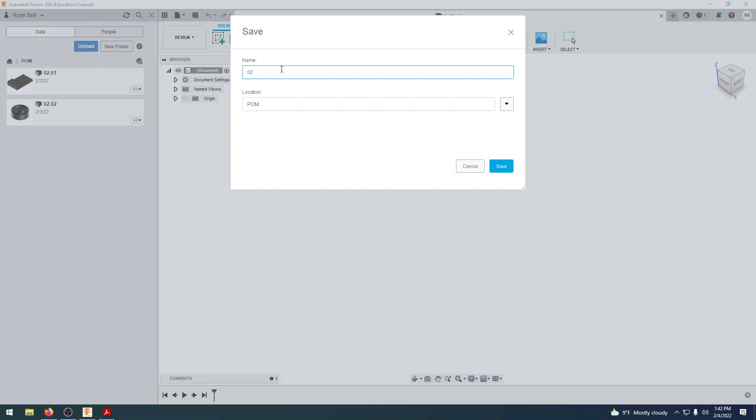So let's begin. Before we start, we always want to make sure we're saving our stuff in the proper folder, so we're going to open up our data panel. I'm in the wrong folder for my class, so I'm going to go to my home project list. I've been saving these in a folder called POM, so there's my first two right there. I want to save this as 2-3, and we'll click save before we even start.

Now that we're set up, let's take a look at our part. We have a socket head with two circles that are 3/4 of an inch apart, and then we're going to draw two tangent lines on them.

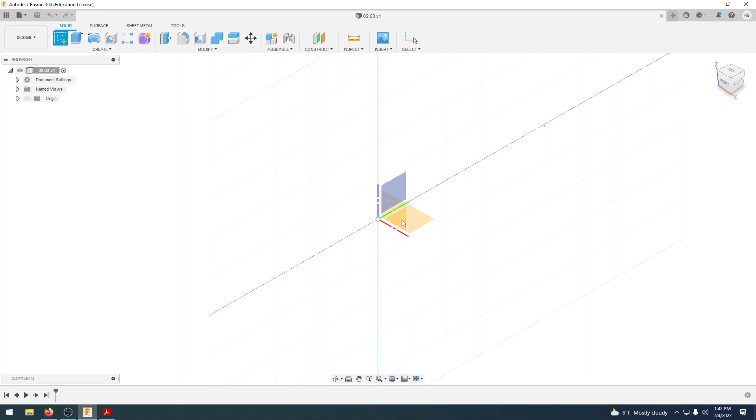I'm going to go back to Fusion and create a sketch, and this one I'm going to put on our XY plane. Remember, our X's are red, our Y is green, Z is that blue plane, and we'll be doing more in the Z plane later on. We have a radius of 0.6 for our bottom circle, and a radius of 0.75 for our top circle.

Remember that our radius is half of our diameter, so when we draw our circles it gives us a diameter, so 0.6 times 2 is 1.2, which will be our bottom one. And this point is about 0.75 above that point.

So I'm going to create a construction line. I'll create a line, change it to a construction line, and start from that center point and go up 0.75.

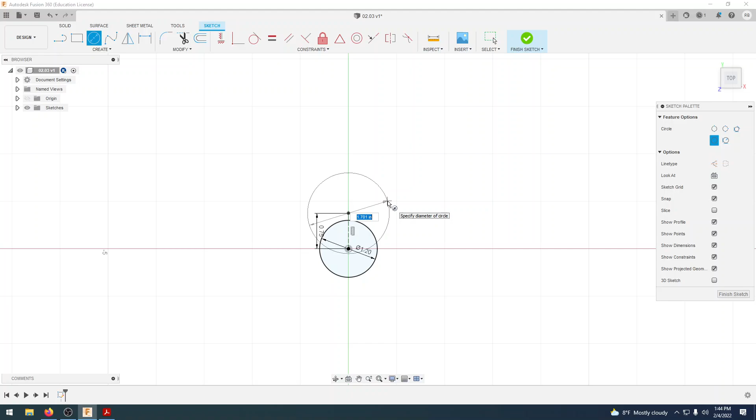Now I'm going to change it back to my regular object line, and create another circle on top of this line. This is going to be a radius of 0.75, or a diameter of 1.5, because our diameter is twice that of our radius. So now I have two overlapping circles, and I want to draw my two sides here.

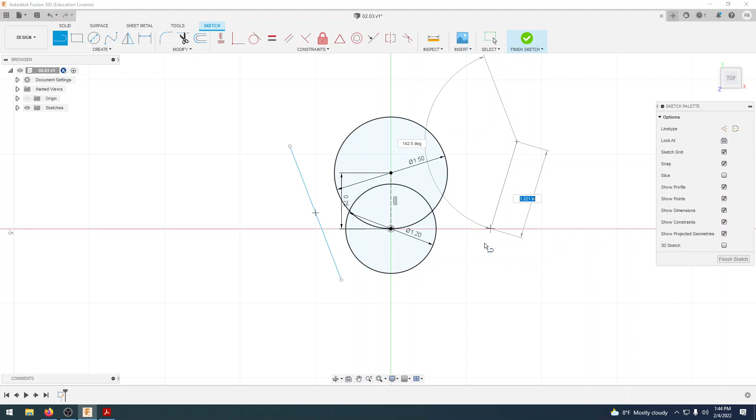So I'm going to draw a line, just off to the side, and hit the check mark to complete it, then the same thing right there. It doesn't really matter the angle or the distance, because the next thing we're going to do is make this line tangent to both that circle and that circle, and the same thing on this side.

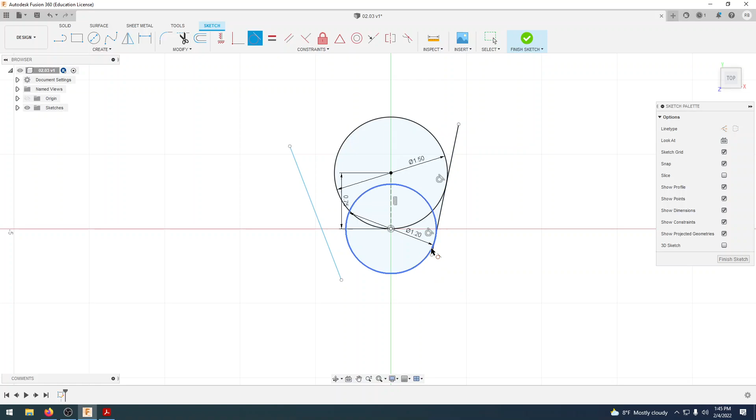I'm going to select my tangent constraint, because we notice these two circles are fully constrained - the lines are all black, but these two are still blue, so we need to constrain these. I'll take my tangent constraint, select the line, and select my top circle, same thing with this bottom one, so now this one is tangent with that side. Then we'll do the same thing on this side as well.

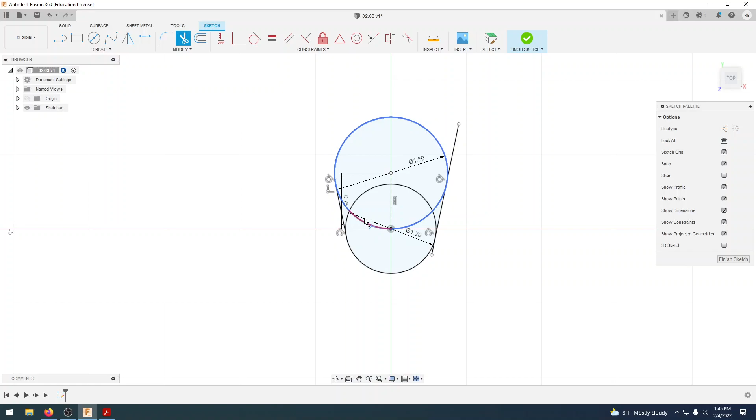The last thing we want to do is trim it. If you don't have your trim right there, you can click modify and go down to trim, or use the letter T on your keyboard as a shortcut. We're going to trim away the lines we don't need - don't need that line, don't need that line, and we'll trim away that right there. When we're finished, we click Finish Sketch, and there we have our completed sketch.

The next thing we want to do is go back to the print and take a look - it is 1 inch the entire way, and that will be really important later on. Also, from there to there is 83 degrees, or if we were to draw a vertical line right there going in, that would be 7 degrees coming in.

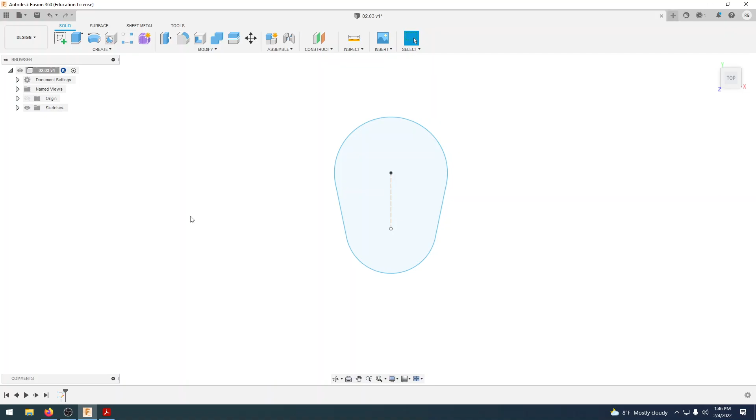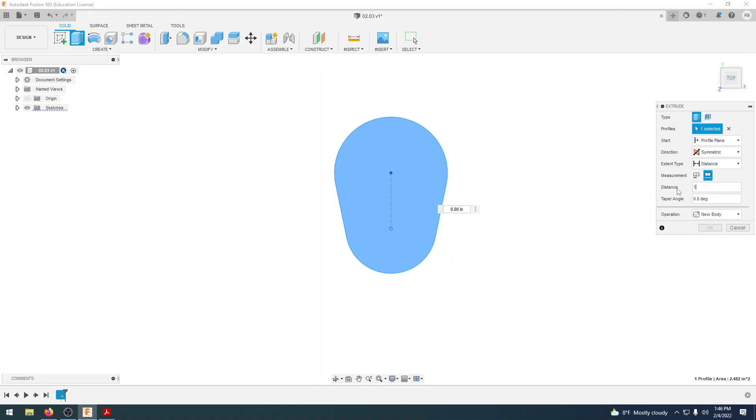We'll do that all in this extrude. So I'm going to extrude this sketch right here, and in our extrude window, instead of just having one side for our direction, I'm going to do a symmetric extrude. We want to make sure we're using a distance, and it's going to be the whole length - remember our distance was 1 inch, meaning it measures 1 inch the entire way.

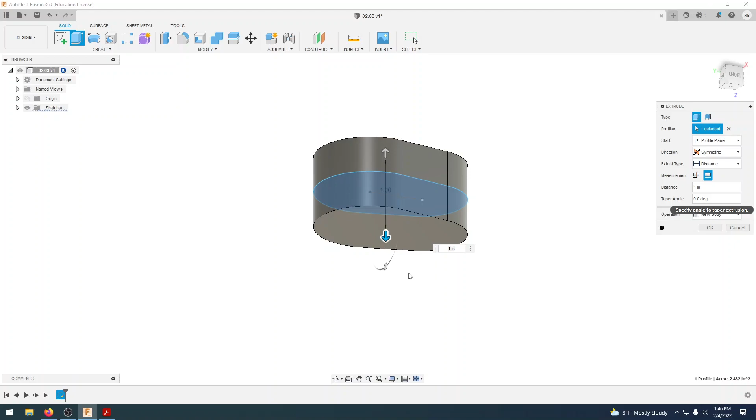If I did this first one, it would only be that inch measurement on one side, so that would actually be 2 inches, but I want a whole length of 1 inch. Just a reminder, to orbit around you hold down shift and your scroll wheel to be able to do that.

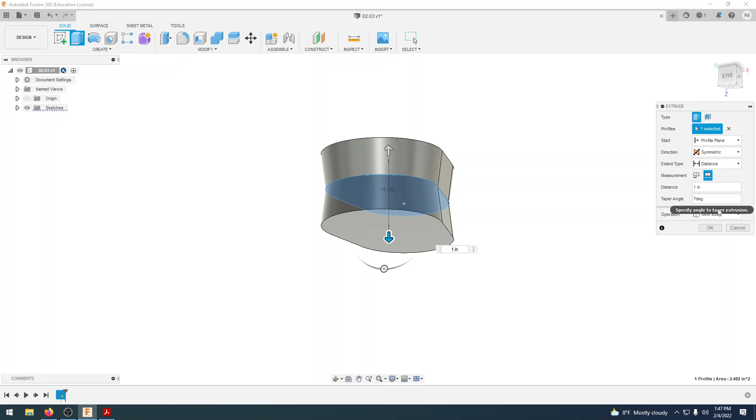And then the last thing we want to do is put in a 7-degree taper. But if I put in a 7-degree taper, it goes out, and if we look at the print, I want it to go in right there. So instead of tapering it like that, I'm going to change my 7-degree to a -7-degree. And there we have the shape that we want, and we'll press OK. Now you will see that we have a new body over here.

We have all of our sketches being built up in our browser. So let's go back to our print and go to the next section. We have a bunch of holes and different offsets. The first thing I want to look at is this portion right here. We can see it is offset by 0.125, or 1/8 of an inch, rounded up to 0.13. So we're going to do an offset of 1/8 of an inch, and then we are going to extrude that down 1/8 of an inch.

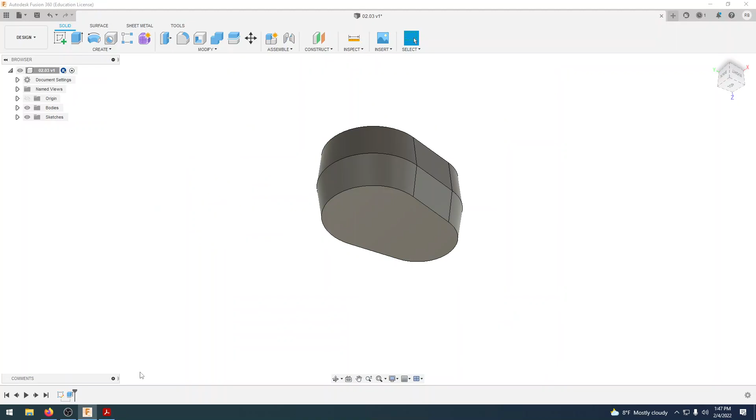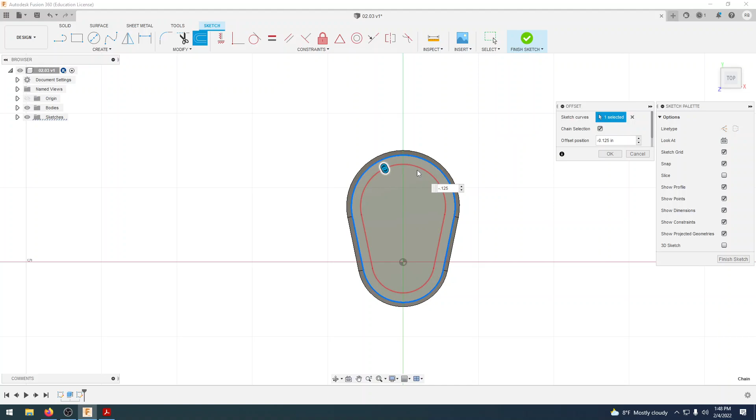So we'll go back to Fusion, and I'm going to create a sketch on this front plane, and it'll bring us normal too. I'm going to create an offset, which is in our modify, so I'm going to offset that outside line, and we are going to go -0.125, and that will bring me in 1/8 of an inch. We'll press OK, finish that sketch, and do an extrude cut at -0.125. So that will cut our part 1/8 of an inch. That's the first step.

Let's go back to the print. The next step is this cutaway, which would be this pocket right here. We're not going to worry about these holes yet - those go all the way through, but we just have this cutaway. Here we have a radius of 0.5, which if we were to draw that as a circle, it'd be a diameter of 1 inch. Then the same thing right here, we have a radius of 0.35, or a diameter of 0.7.

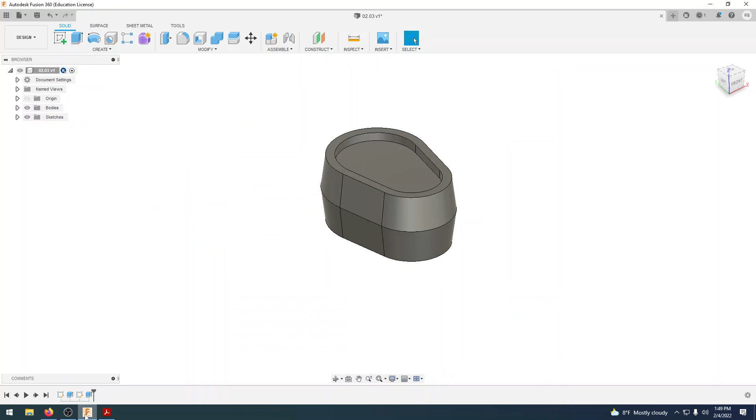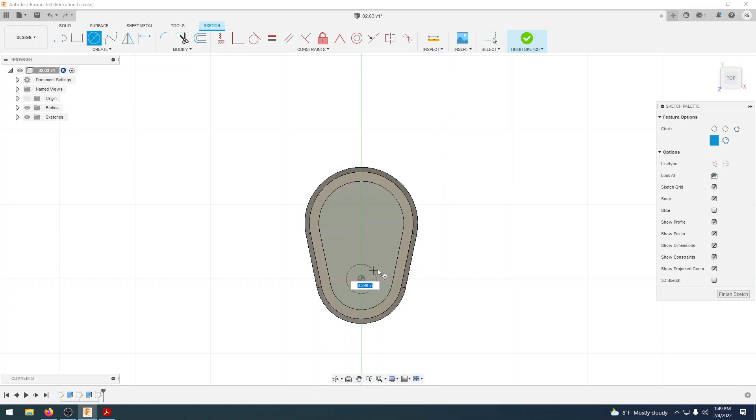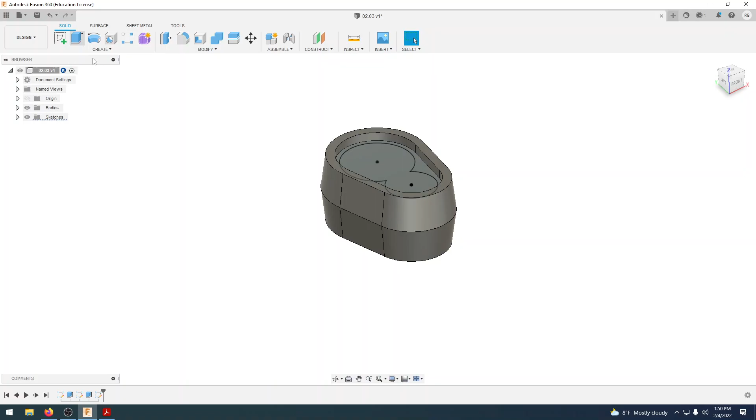Just like before, I'm going to come in and trim away the parts that I don't need, and we'll finish that sketch. Come back to the print, and from that point to that point, we extrude cut down 0.75. Come back to Fusion, extrude cut down -0.75. Make a cut, press OK, and now we are almost done with the top.

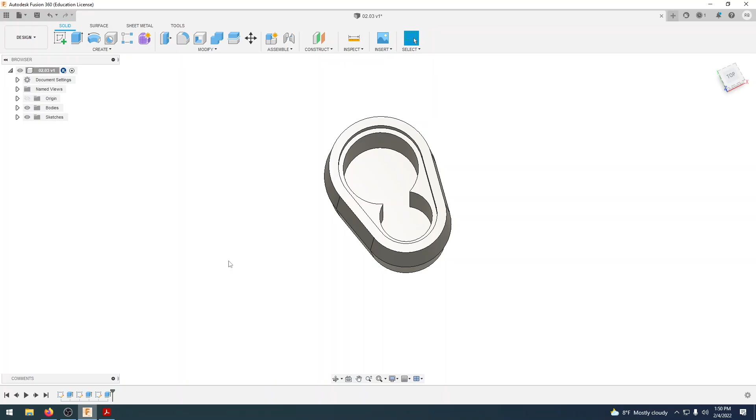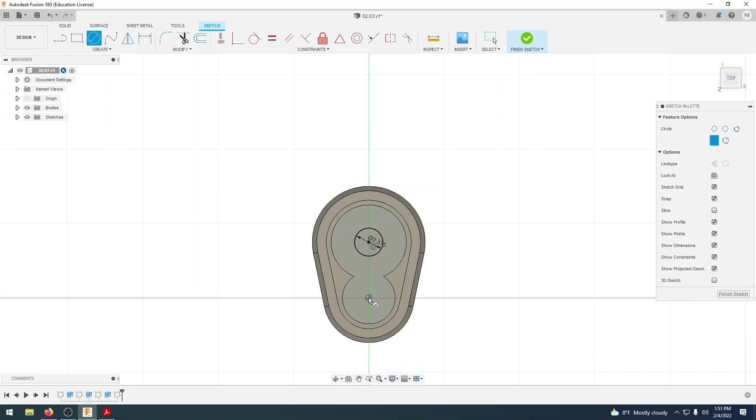We just need to put in our 2 circles down there. I come back here, and these 2 circles are 3/8 of an inch, 0.375. We'll go back to Fusion 360 and create a sketch. Again, make sure that we are going on that bottom face, and create a center diameter circle. Right there, that's going to be 0.375. Then I'm going to create another circle coming off of our origin that's going to be 0.375. We'll finish that sketch, and we'll extrude cut that all the way through.

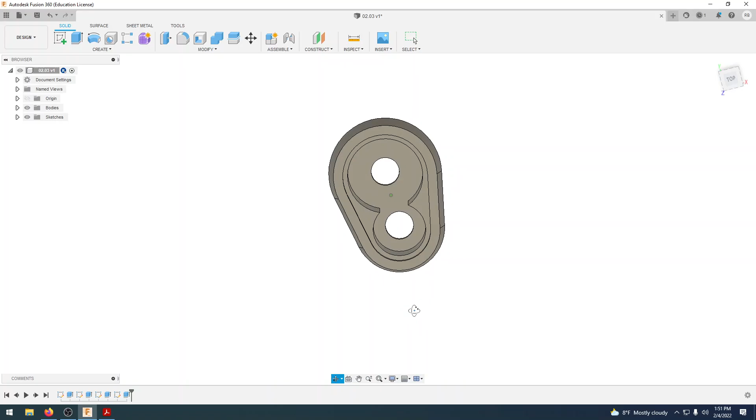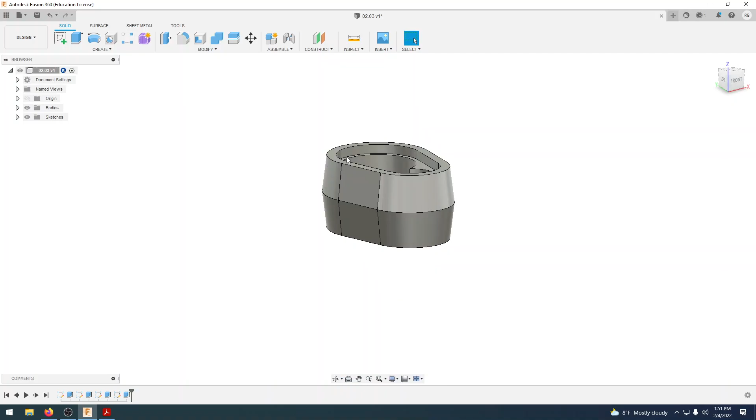So now we have the top of our socket head. The last step that we want to do is create our handle here. So when we want to extrude this, or model this, we're going to want to draw a sketch and then extrude it back. However, if we were to try and put a sketch here, because it's a curved surface, we're never going to be able to actually draw on there. So what we'll need to do is create a construction plane at this surface right here. We'll draw a sketch on there, and then extrude back to our socket head.

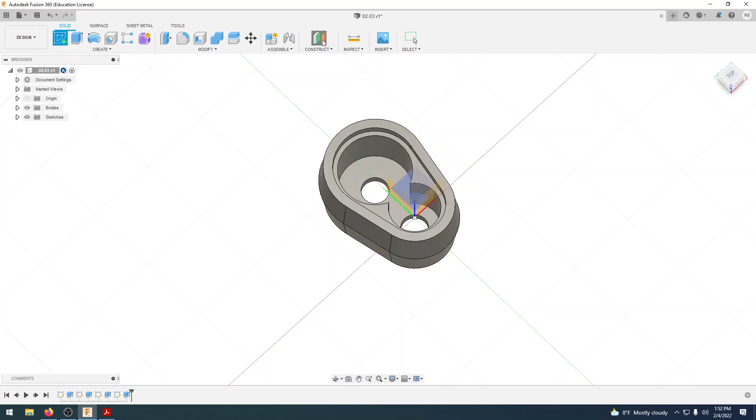So to be able to do that, we'll just double check - we have a dimension of 3.75. So we have a flat plane right there. What I'm going to do is create an offset plane, and I want to select my XZ plane. Remember, X is red, Z is blue. I'm going to select my XZ plane, and I want to bring that down that dimension that we had before, which was negative 3.75.

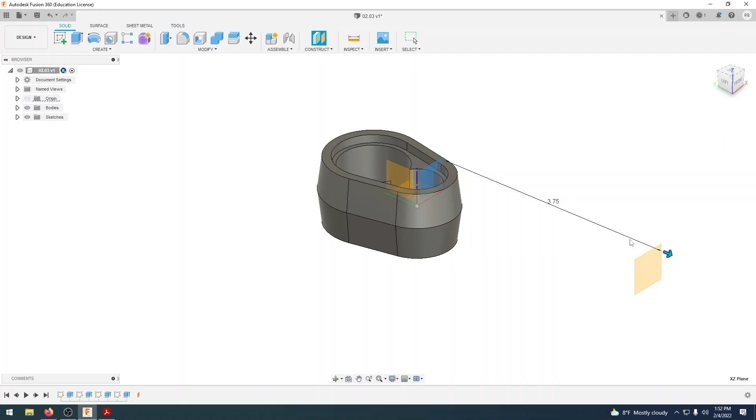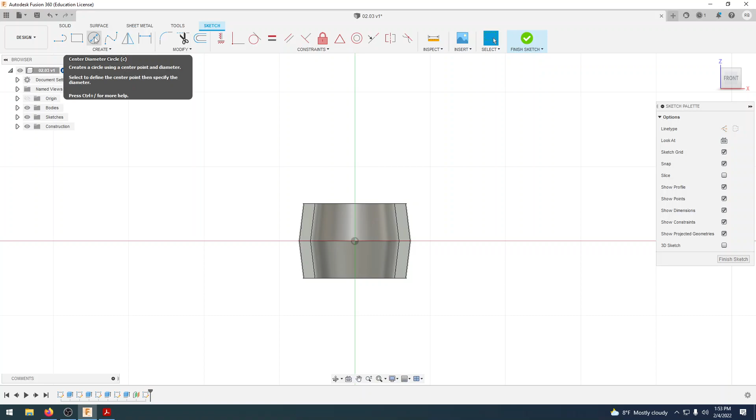So now out here we have a construction plane, or a flat surface that we're able to put a sketch on. Let's take a look back at our print. Our diameter for this portion is 1/2 inch, so we'll go back to Fusion. I'm going to select my center diameter circle and select 0.5 for the diameter on this. Then what I'm going to do is extrude this back to my socket head.

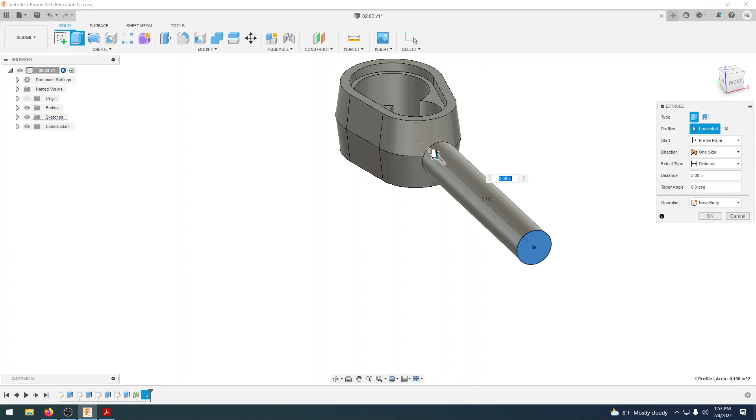However, if I just bring this back, it won't quite line up perfectly. I'll have some gaps. Or if I bring it too far, and if I don't have it cut but joined, we can start poking through.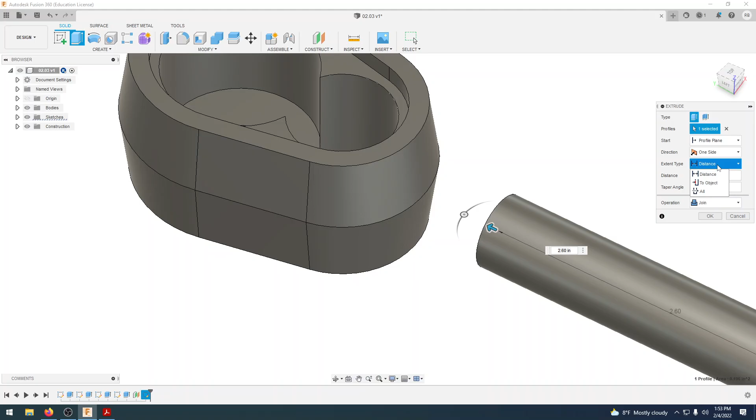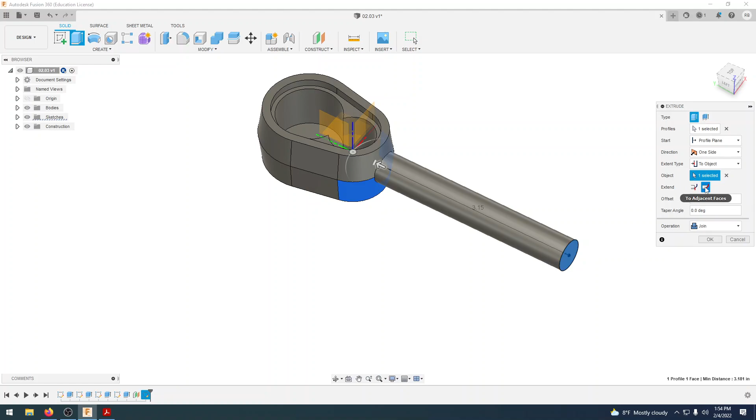So when you have instances like this, what we can do is for our extent type, instead of doing a distance, we can do 'to object,' and that will allow us to select our faces. We want to select two adjacent faces. If you just do 'to the selected faces,' it may give us an error, but what we want to do is select two adjacent faces. That's going to say, hey, we want to extrude from this plane right here, and you're just going to keep going until we hit a face over here, and then stop for that extrude. Now we can see that it is meshed in exactly how we want it.

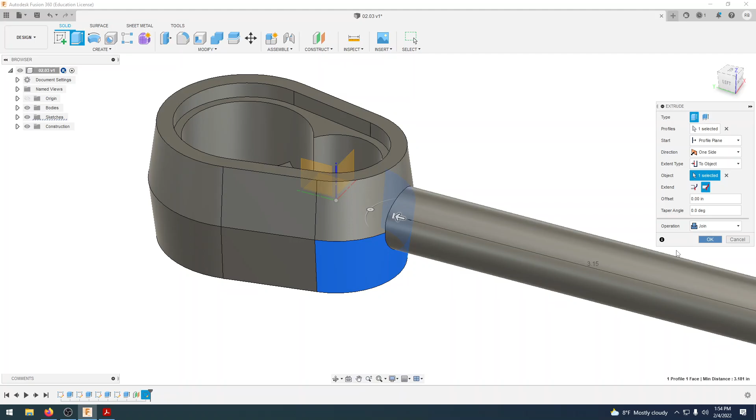All right, so we'll go back to the print. The last thing that we have is a rectangular handle that is 4 inches by 1 inch. However, we have this draft on the sides that we can see down there, so that it's a little bit angled to relieve any sharp edges.

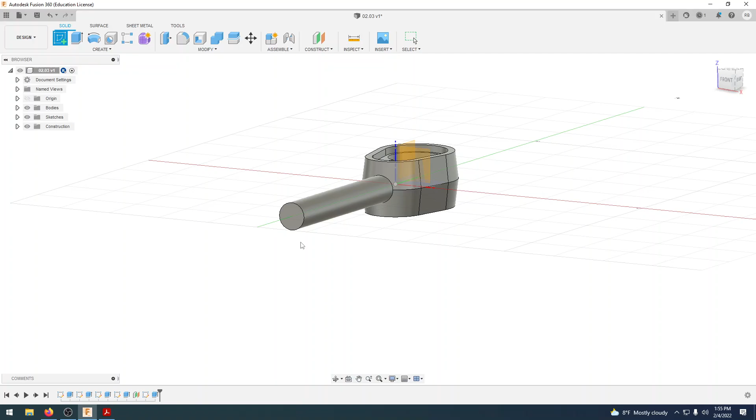So to be able to do that, instead of trying to draw from here coming back, which would only give us a rectangle, what I'm going to do is create a sketch on this top face. Now remember, when we created this, our origin is right in the center plane of this. So I'm going to select my XY plane and create a 2-point rectangle.

For right now, it doesn't really matter how big it is or where we put it. Just put it somewhere close to the bottom where it should be in our handle. Let's take a look at the print. It is centered, and it's 1 inch wide, which would mean that from here to the center point is going to be 1/2 inch. And it is 4 inches tall, 3.75 from that center point down.

So I'm going to dimension, and to be able to select your dimension, you can either do create sketch dimension, or click on sketch dimension right there, or press D on your keyboard, which is a shortcut key to do a dimension.

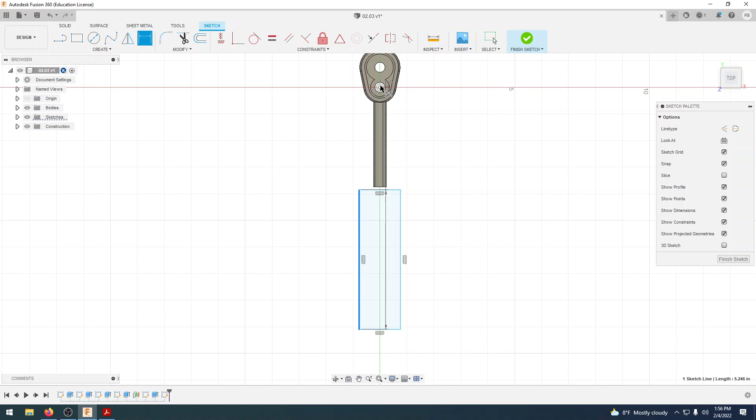So I'm going to select this side right here, and select that point for our origin. I'm going to type in 0.5. I'm going to have a width of 1 inch. From this point down to the top, it's going to be 3.75, and then the overall height of this is going to be 4 inches.

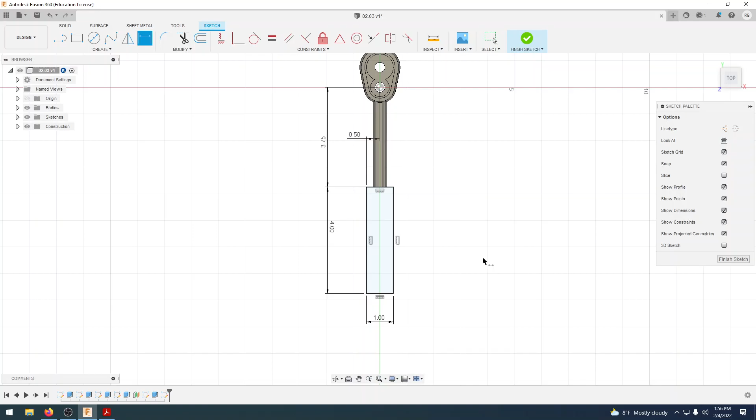So what we can do then is finish that sketch, and we'll extrude this and double check our print. It is 0.75 thick, or 3/4 of an inch thick, with again that 7-degree draft angle on there.

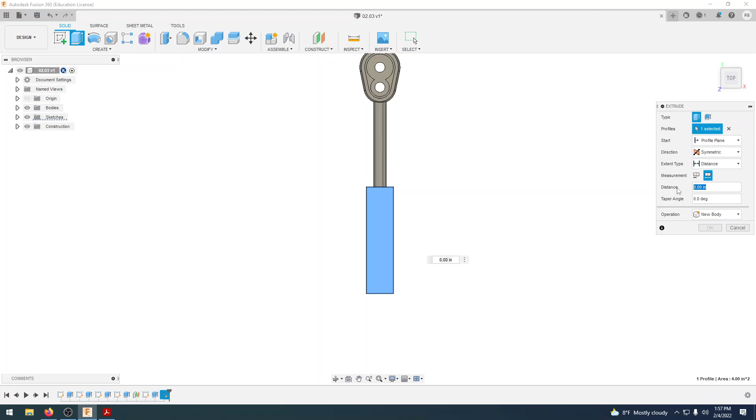So how we did that is we change our direction to symmetric. It's going to be a whole length of 0.75 with a taper angle of -7 degrees. Before we hit OK, we're just going to double check that our draft angle is going the right way. Just a reminder, if I put regular 7, it would go out, which would be a fairly painful wrench to be using, so we're going to put it at -7 and press OK.

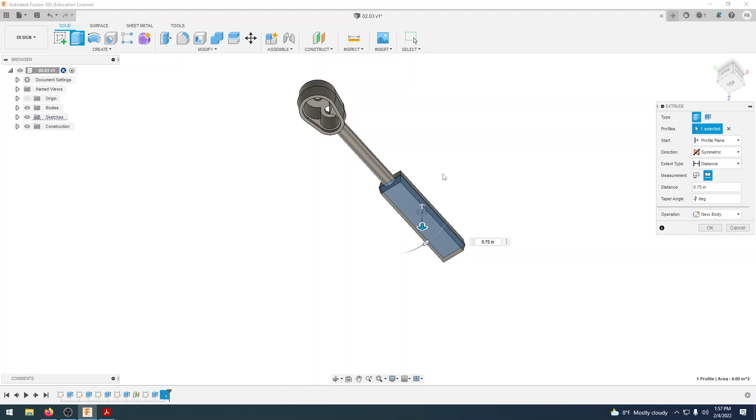All right, the last thing we have are our fillets that we're going to be putting in, so we want to ease our corners. Around here we have a diameter of 0.12, a radius of 0.06, and then we also have a radius of 0.06 at all 4 of our corners. And on these edges right here, we have a radius of 1/8 of an inch.

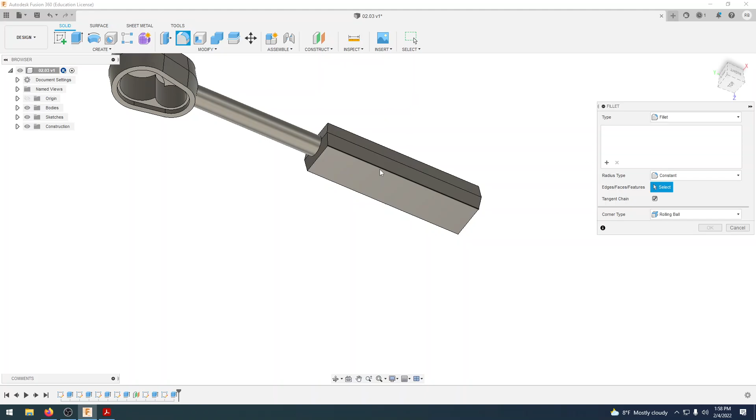So we'll go back to Fusion, and I'm going to select a fillet, and I'm going to select all 4 corners of these. Our radius for that is going to be 0.125.

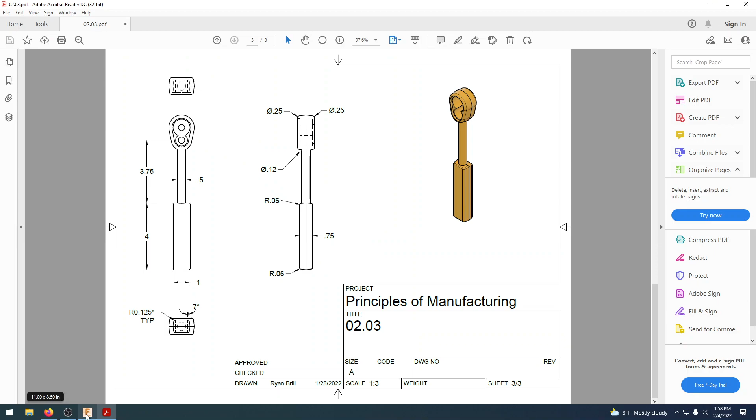And then the last one is we are going to be going on the top, on the bottom, and then around here, and that is going to be a radius of 0.06. So we have that one, that one, and that is going to be a radius of 0.06 for center.

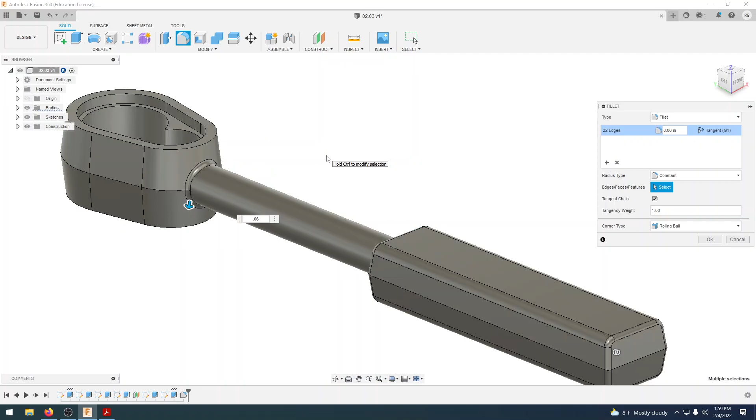And now your ratchet is complete. Make sure that we save this when you're done, and then you can show your instructor.